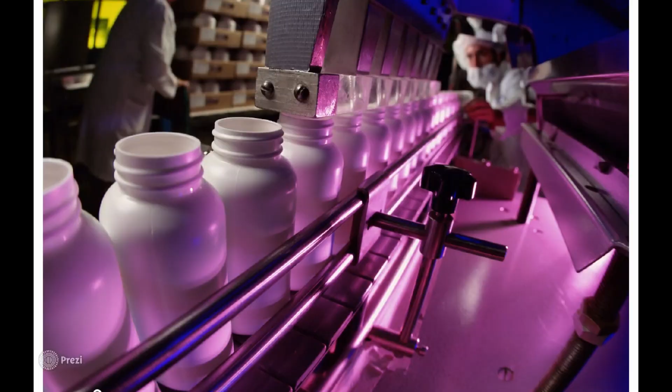We will be focusing on pharmaceutical, automotive, and food manufacturing operations in Ontario. The video presents ideas and recommendations on how to integrate the Internet of Things into manufacturing processes using information obtained from manufacturing and current research.

The Internet of Things has the potential to innovate Ontario's manufacturing sector by improving inventory and demand monitoring, product quality, production efficiency, equipment maintenance, manufacturing safety, and many others. These allow for Ontario's manufacturers to have a competitive edge in the national and international marketplace.

First off, we will talk about how IoT can impact a manufacturing company's monitoring and tracking of inventory.

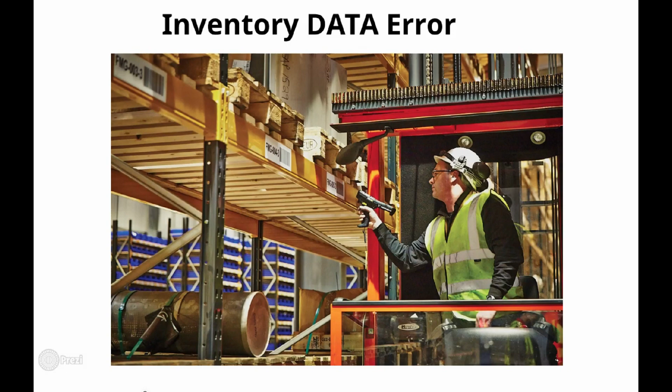Currently, most companies are facing the problem of inventory data error from using hand calculations and estimation software to track their inventory. In the past 20 years, manufacturers have spent a lot of money and hired numerous employees to attempt to accurately monitor their inventory and demand.

Sometimes, in order to meet the peak demand, manufacturers will overstock their inventory. This will increase storage warehouse costs.

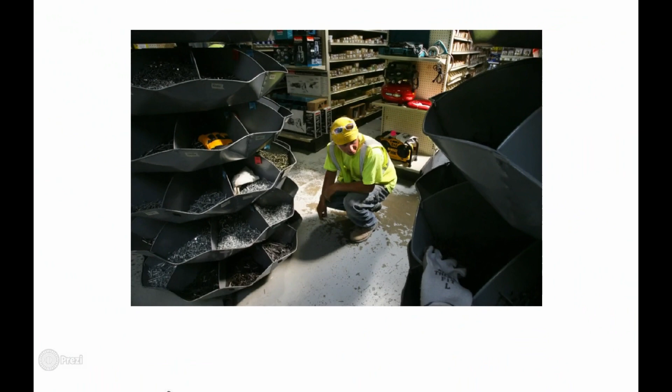Because of errors made in counting current inventory or estimating demand, manufacturers have difficulty accurately predicting future supply. Producing more than the demand is a waste of resources, but producing less than demand can lead to costly rush production and customer dissatisfaction.

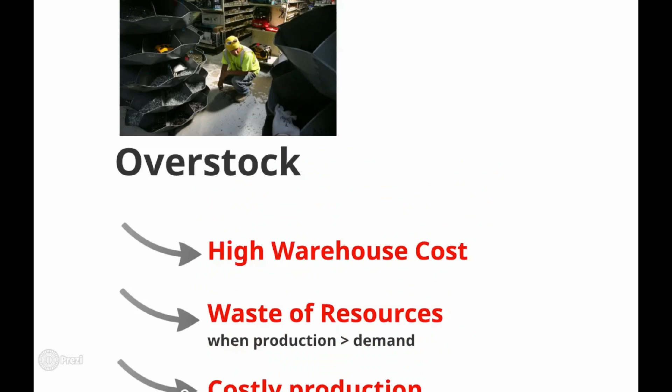IoT can be used at manufacturing facilities to resolve these issues in inventory management. The first solution is to put a radio frequency identification (RFID) device on every item. This can help track the movement and history of each individual part or item.

By using camera or scanning technologies to read RFID, the inventory and demand data can be calculated more accurately. By analyzing this data, we can predict the future demand and inventory requirements. Since this data was automatically collected by a machine, it can be updated immediately.

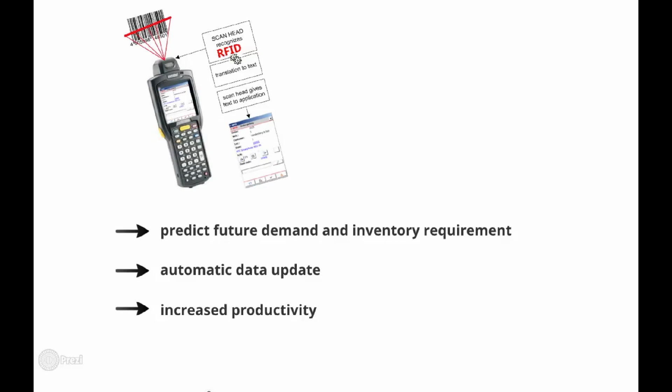We can also automatically place a supply order by machines. This could save a lot of time and money for the manufacturer.

Another solution is to use a GPS to track items produced at a manufacturing facility. IoT can be used to collect useful data about how long it takes for each item to reach suppliers and customers, how many items are purchased by a particular customer, and locating defective items quickly so they can be easily recalled.

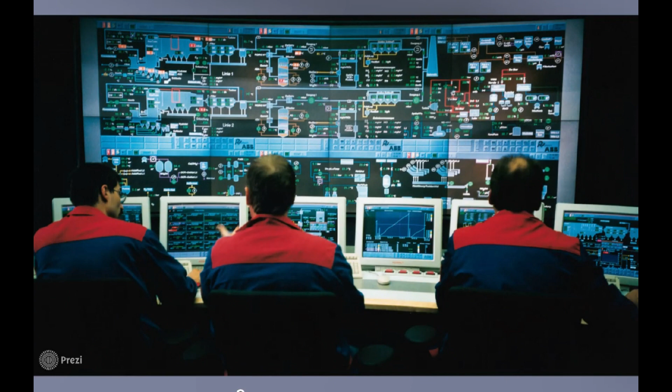By using IoT, managers can check the latest live data anytime they want, and they can use the data to generate reports to view useful demand and inventory supply trends that were not possible before.

Quality control is a very valuable process in the manufacturing environment. The main issue with quality control is that most manufacturing plants have humans doing the majority of the work. This leads to a far from perfect result of the number of defective products that are shipped out.

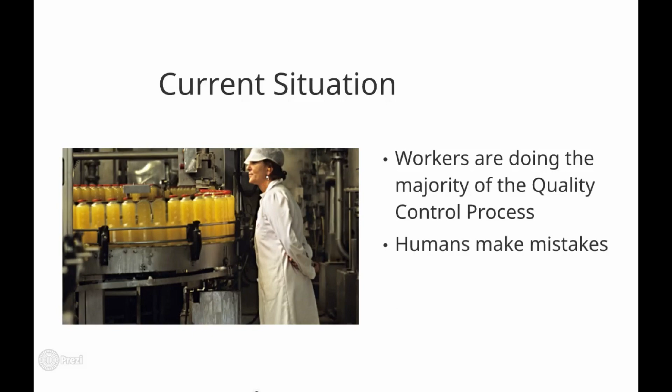The problem is the cost incurred can be around thousands of dollars per defect. Also, shipping defective products can sometimes ruin a company's reputation with its customers.

The actual workers that are responsible for quality control processes ensure that there is a consistent color, shape, and weight for the products.

Sometimes for food products, they will need to measure the actual temperature of each product that goes through the assembly line. In general, these workers visually look at the products for defects, which can lead to a potential for some defective products shipped out.

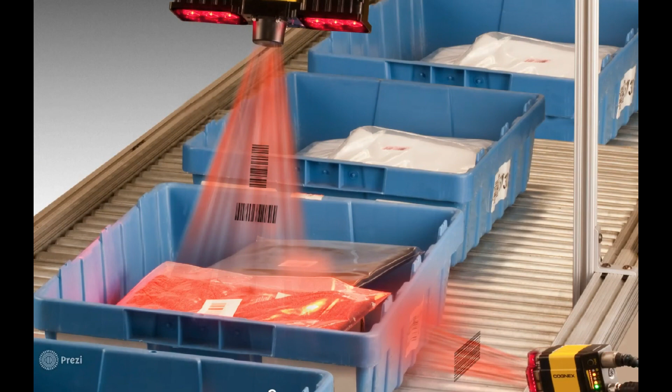The implementation of the Internet of Things to quality control manufacturing can ensure that the accuracy of detecting manufacturing defects increases. Laser technology can be implemented which will help identify package defects.

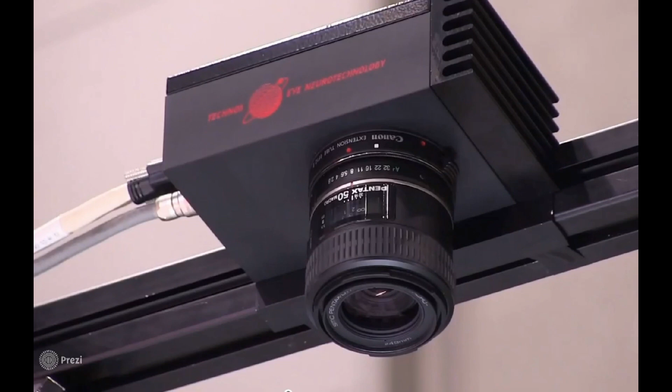Through this technology, thickness, size, and surface contour of the products can be measured accurately. Camera technology can also be implemented. Its use can help us determine the color and the shape of the products.

Implementing a machine to measure the temperature of all products would help automate the process. The machine would help with measuring the temperature of the food, especially in the frozen food sector.

All of the devices could be connected using the Internet of Things, as this would allow for data collection and analysis. Using the Internet of Things, we can create a software that is responsible for monitoring and report generation of the data.

Using data collection, a manufacturing company will be able to make adjustments to its process by analyzing historic information. A simple scenario would be where several products are failing the temperature check. The software would then alert the part of the assembly line responsible for freezing the food.

Another key feature that would exist in this software is the ability to generate one-click reports that help analyze the quality control process. This would help identify any weaknesses in the assembly line by simply observing the data in the report.

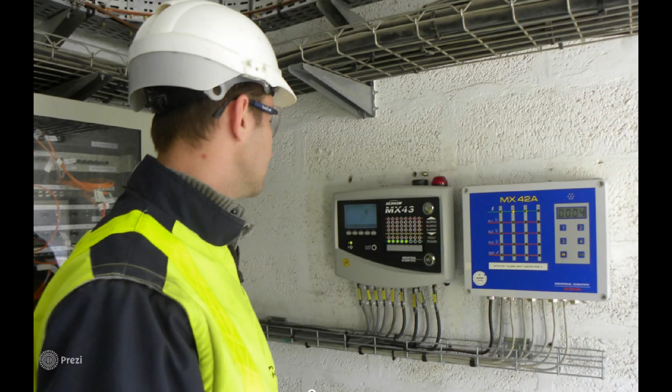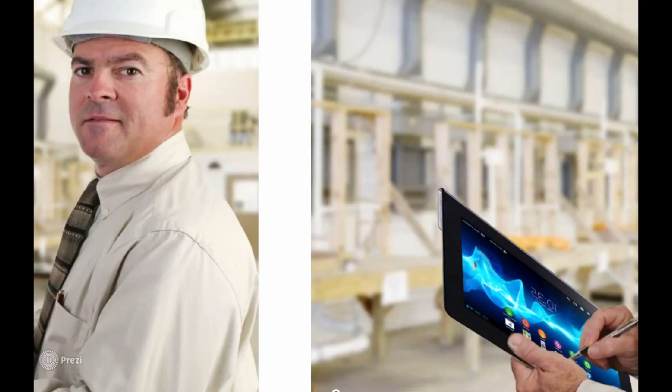Machine maintenance in manufacturing is a big deal, which is why utilizing IoT technologies in this field can boost a company's performance.

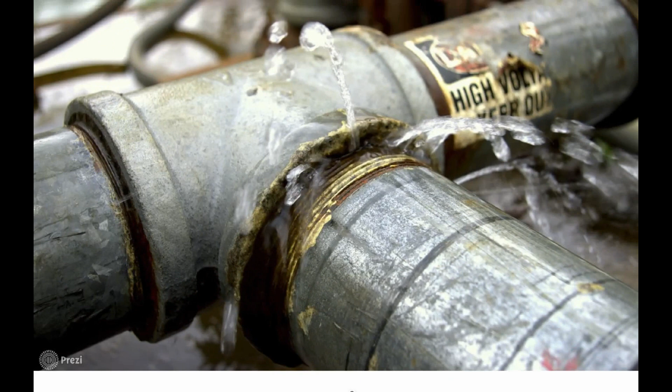In the current state of most manufacturing companies, when a piece of equipment or machinery breaks down, it might take some time for anyone to notice and then even more time to fix the disturbance. The reaction time to fix a machine and the downtime of a machine costs money to a company, as the production process is most likely slowed down or completely stopped.

This is an issue that affects the profitability and production of a manufacturing plant. Machines within a manufacturing company will need to be maintained on a regular basis in order to keep them functional and productive. Usually there is a predefined schedule suggested by the manufacturer or the machine itself. The issue with this is that in practice, these maintenance jobs are not always done on time or are done too regularly.

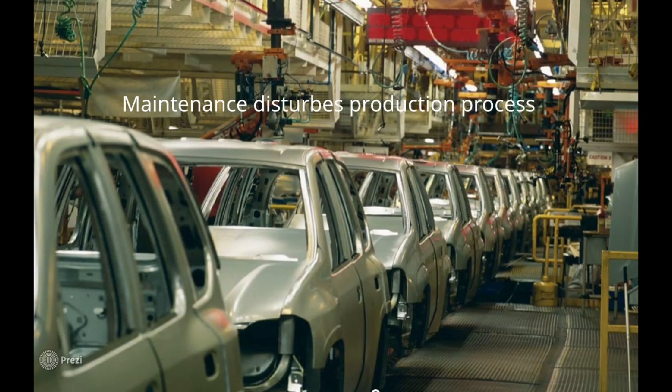This causes waste in terms of maintenance cost and downtime of the production line. Maintenance could negatively affect and interrupt the manufacturing process. Maintaining or fixing this equipment also requires specialized technicians. The issue with machines that undergo breakdowns and maintenance is that they are not productive during that time.

Therefore, it is difficult to estimate the overall efficiency of a specific machine. It is hard to determine if a machine yielded a good return on investment by comparing that purchase price to the production of the machine because of the downtime that is not tracked and logged.

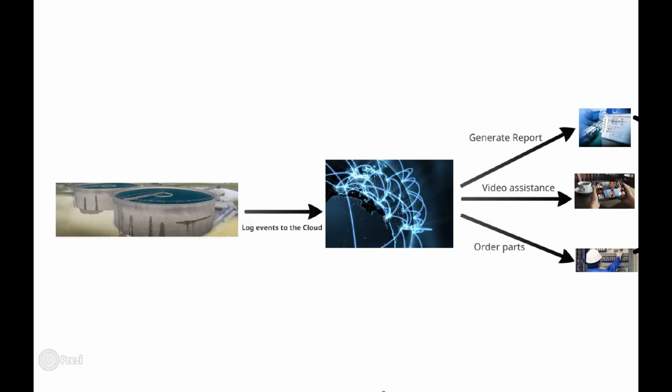IoT can have a significant impact towards changing the process of machine maintenance. In the future, when a machine breaks down, the incident will be automatically reported to the necessary people. A report will be generated with the reasons of the incident.

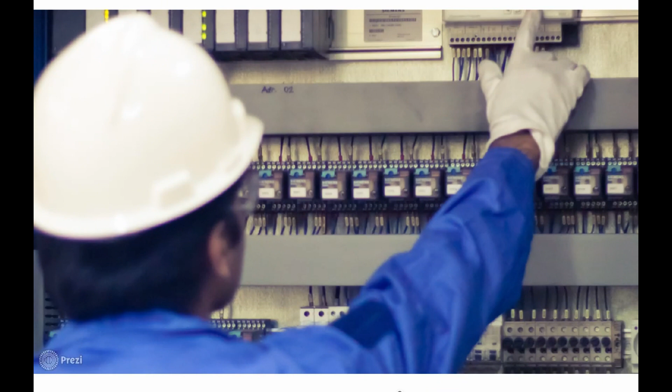In addition to having this information published automatically, it can be connected to the cloud in order to be able to order the necessary parts to fix and purchase them, as well as assigning someone to fix it as soon as possible. The fixing process can be done by either having someone from outside the plant come in and fix it, or if the fix is simple enough, a video conference in the plant can be done.

Maintenance will be scheduled automatically and reminders will be sent appropriately. Maintenance can be anticipated based on previous failures data. Connecting every machine's maintenance schedule and anticipated workload can optimize the maintenance schedule.

The automated system could defer maintenance if it is determined through data analysis of the historical data that it does not have to be done until a later time.

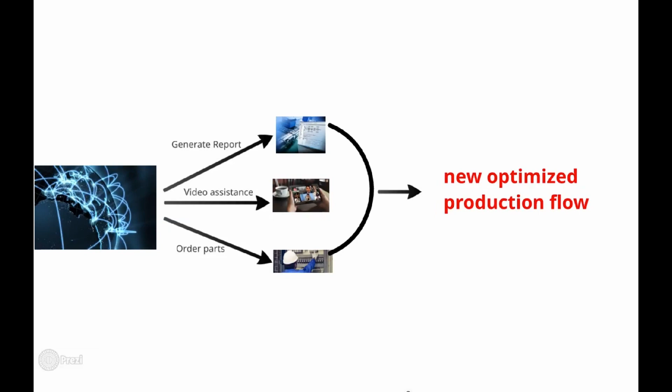When there is maintenance or breakdowns, a new plan to optimize and continue production will be decided and put into an application automatically, based on the information available from the network of connected machines, the supply, the demand, and the available resources. To make sure a specific machine is performing as expected and to calculate the return on investment, every time there is a downtime for a machine, it will be logged to a database that will automatically generate reports concerning the performance and production of a machine.

This will allow managers to determine if a specific piece of equipment was worth the purchase, or if another supplier should be selected next time a purchase has to be made.

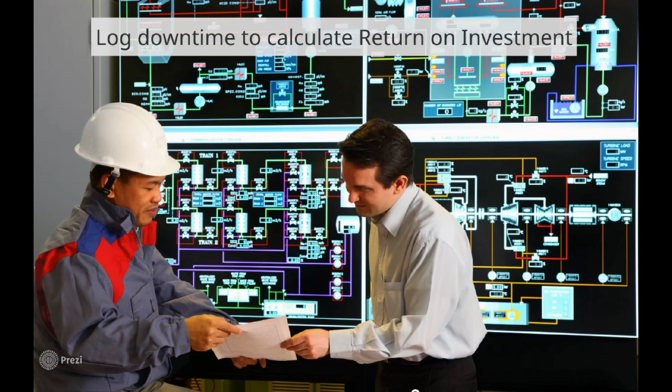Another major application of IoT in manufacturing is in machine and human safety. IoT can be used to control, monitor, and report unusual or potentially hazardous equipment activity, streamline safety interlock systems, and protect the safety of employees.

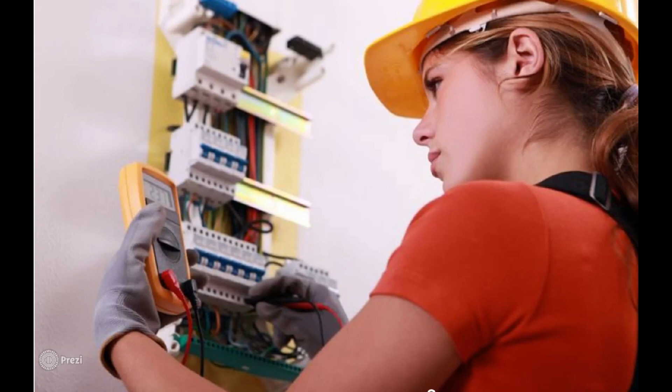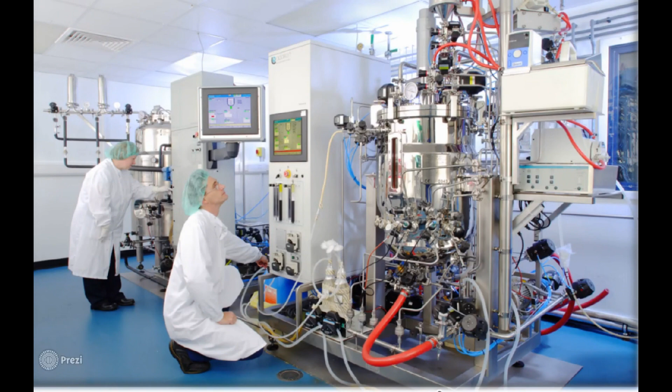An issue with older manufacturing facilities is that many of their equipment systems are not automated, so workers are required to manually operate and control the equipment. This can put the worker and the equipment at risk if the worker forgets a step in their routine procedure, or if they are unaware of upstream equipment problems that would cause their routine activities to damage equipment and products.

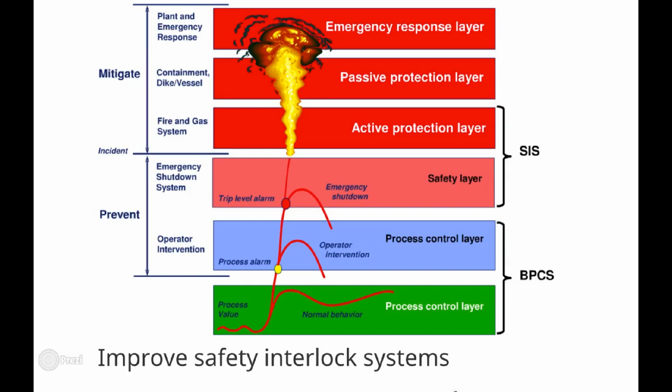To prevent this from happening, IoT can be used to improve safety interlock systems and prevent or quickly fix errors made by workers. This can be done using sensors to connect people to machines, alerting the control room that there is a problem with a piece of equipment and dispatching the appropriate people to fix it. Sensors can also be used for machine-to-machine communication to allow for automatic and safe shutdown if equipment is malfunctioning.

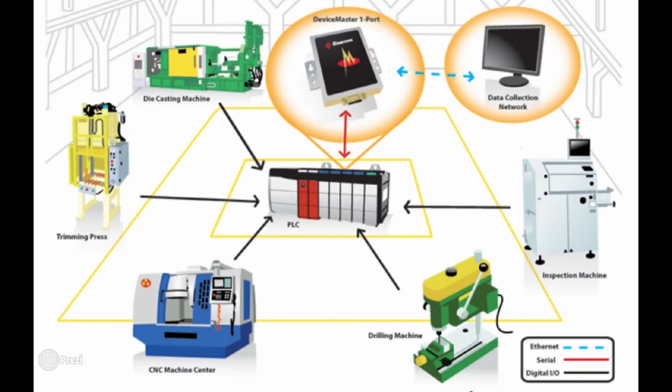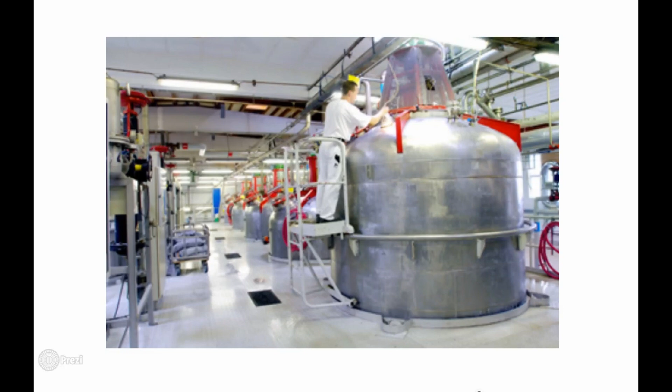Another current safety issue in manufacturing is that there is no way for control room personnel and managers to know the location of their floor workers at any given time. If an accident occurs and a worker is unconscious, injured, or unable to call for help, there will be a large delay before emergency response arrives, which would be too late.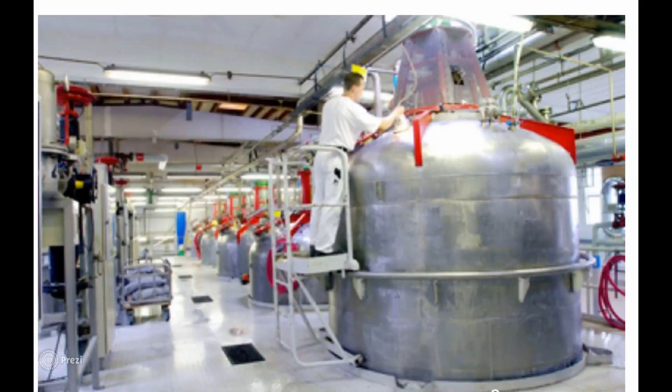IoT can be used to prevent this scenario by having each worker wear a wireless device while working in the plant that has sensors to detect body temperature, harmful gas exposure, heart rate, and track location. This could be in the form of a headset, wristband, or a shirt tag.

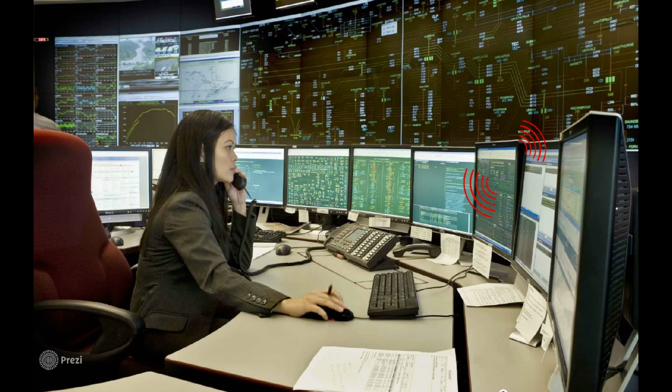IoT can be used to connect the data collected from the sensors to the control room and emergency response team, so that if a person becomes harmed, help can be dispatched immediately to their exact location.

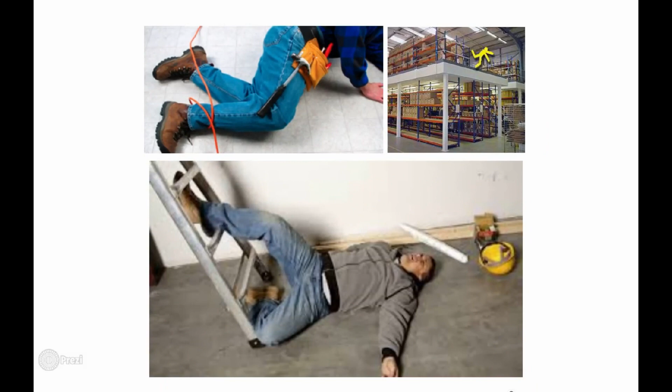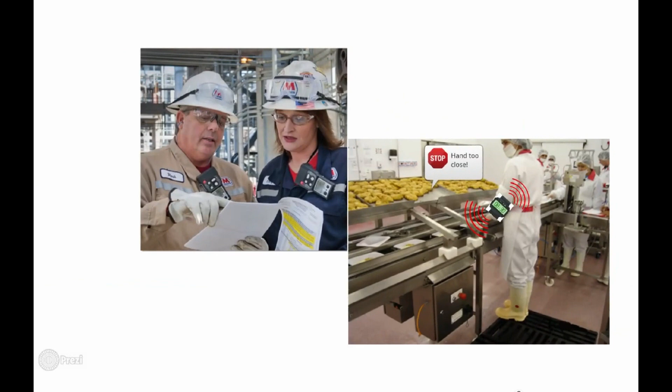Another issue with safety in manufacturing is that many incidents and near misses occur due to workers not recognizing hazards while working on site. These incidents include slips, trips, falls, minor injuries from hot or protruding objects, and near misses with equipment that have moving parts. To prevent incidents and near misses, the same wearable IoT device mentioned previously can send alarms or alerts to caution the worker before they interact with hazardous equipment or enter a dangerous area.

The device can have sensors that detect and warn the worker of slip and trip hazards and proximity of sharp, protruding, or overhead objects. It can also be connected with plant machinery to alert the worker of equipment that is out of service or running abnormally.

The efficiency of a manufacturing plant can be improved in several aspects. These aspects include efficiency in waste management, energy management, accuracy of the work, and productivity of the assets used in the manufacturing plant.

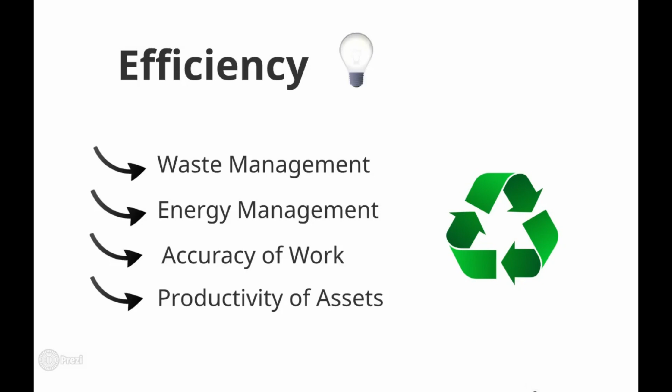Current situation: a lack of machine-to-machine communication through the Internet of Things leads to individual monitoring and maintenance of machines. This can lead to a problem not being noticed earlier on. Furthermore, the productivity of employees decreases if each individual machine needs to be monitored.

Furthermore, if the process requires a lot of accuracy, the output can be flawed or ruined if the machines are not calibrated correctly. This can be a case when the machines are not monitored constantly in real time. These problems may arise in food processing plants that require a strict set of instructions to be followed.

Certain manufacturing processes require an efficient use and management of supplied resources. This can apply to many industries such as the automotive industry, pharmaceutical, and food industry. An efficient management of resources is required to keep the costs low and get as much output as the plant can produce with the given resources.

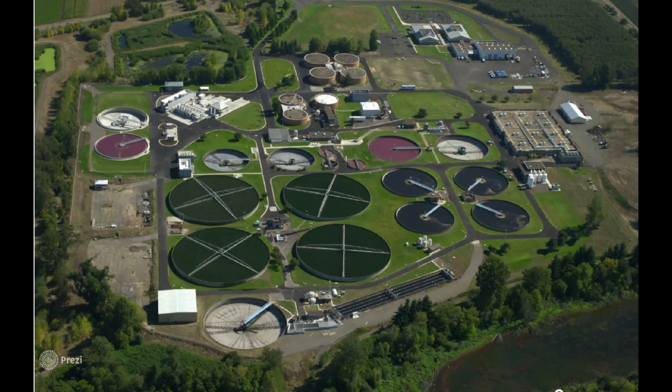In order to achieve this, effective communication needs to be established between different plants. This will allow the company to monitor the flow of resources in different parts of the company.

Increasing demand of a product in certain industries requires higher production. However, in certain industries this may lead to a higher amount of waste being generated, which may prove to be harmful for the environment. For this reason, every country has standards that have to be met by every manufacturing plant if the plant is to remain in business.

Furthermore, the public image of a company can get ruined if waste is not monitored. Finally, there are numerous ways in which the productivity of an asset can increase if a more efficient process is required. IoT can offer proper solutions to this problem that are unique to each manufacturing plant.

Communication between plants can be improved by two-way digital radios that are connected throughout the industrial network. These can assist in effective and efficient communication of real-time knowledge. Through real-time access to people and information when and where it's needed, employees focus on their work rather than attempts to locate resources.

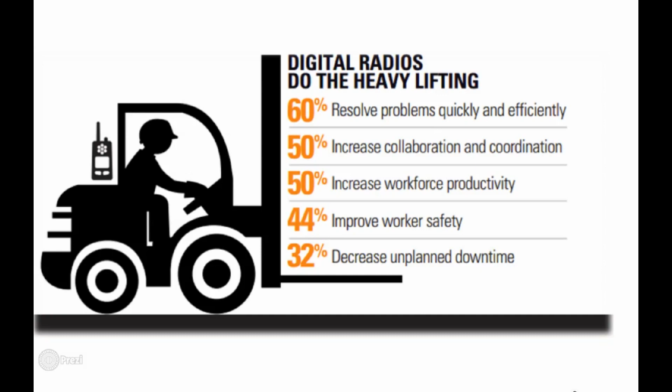Another solution to the efficiency problem is the creation of an integrated architecture structure which allows the machines to connect and enable monitoring by connecting to a central platform software. By allowing real-time monitoring of the manufacturing process, employees are able to increase accuracy of the process.

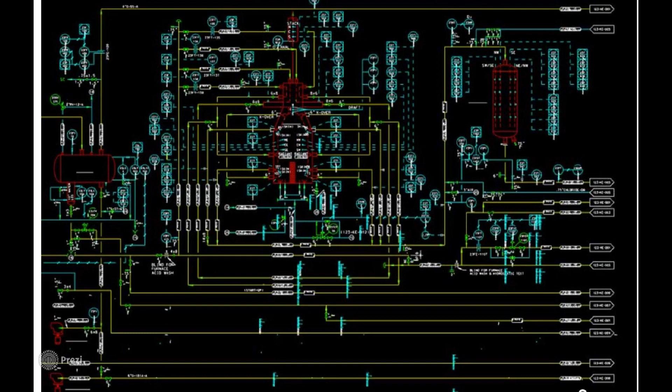Furthermore, certain machines can be connected to the internet. For example, feeding the Google weather forecast into your facility's energy management application can allow it to cool the building or heat it up a day in advance.

Finally, we will talk about risks and barriers to introducing Internet of Things technology. When using connected devices, there are concerns for the security of the system. A secure system is a system that is available, guarantees integrity and confidentiality of data. Having a system that has no security can lead to a lot of different new problems for the manufacturing company.

Having all of this new data that connects to every machine in a plant will generate a very large amount of data that has to be stored somewhere. There are a few options to do so. The first solution is to have a local database. However, this could potentially become very large and difficult to manage.

A second option would be to use cloud computing. This provides easy management of data. However, the company no longer has complete control and the information has the potential of being lost by the contractor.

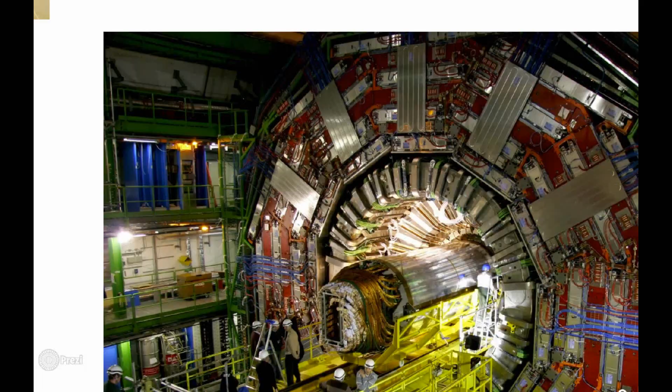Some of these solutions might have very difficult technical problems when it comes to implementing them. This could lead to having either over-automated systems that do not adapt to the reality of each plant, or incomplete systems that promise more features than they can deliver. The technical challenges could be quite large and could also lead to very high prices for technologies that might not improve the profit of the manufacturing plant.

Another barrier can be incompetent decisions made from the employees and managers when it comes to implementing the new technologies. Furthermore, lack of development of machine learning reduces the scope at which machines can be implemented in our day-to-day activities, as well as manufacturing processes.

We can conclude that IoT will have a very important impact in every aspect of the manufacturing industry. It will change the way people manage inventory and demand, control maintenance and repair of machines, improve the quality of control process, increase workplace safety, and improve overall efficiency in a manufacturing plant.

IoT is going to revolutionize the world of manufacturing by bringing efficiencies in all of these domains, which will lead to better output, less waste, and lower costs. Even though implementing these changes now is costly and difficult, in the long run they will help cut down on costs and improve productivity. Companies that start thinking about how to use technology in their manufacturing plants by using the power of networks will have a competitive edge.